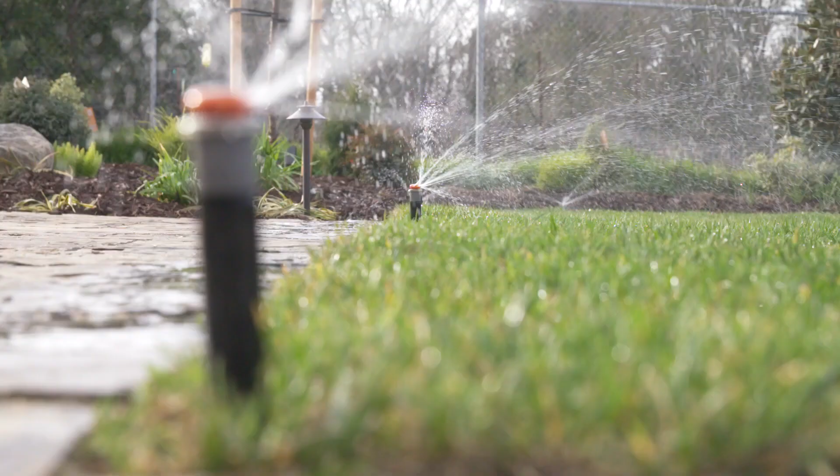A professional automatic irrigation system is designed to ensure different plant types get the correct amount of water they need. Automatic irrigation systems save time by letting the technology handle the routine and time-consuming process of watering landscapes. A modern system saves money by adjusting watering schedules automatically when the weather changes.

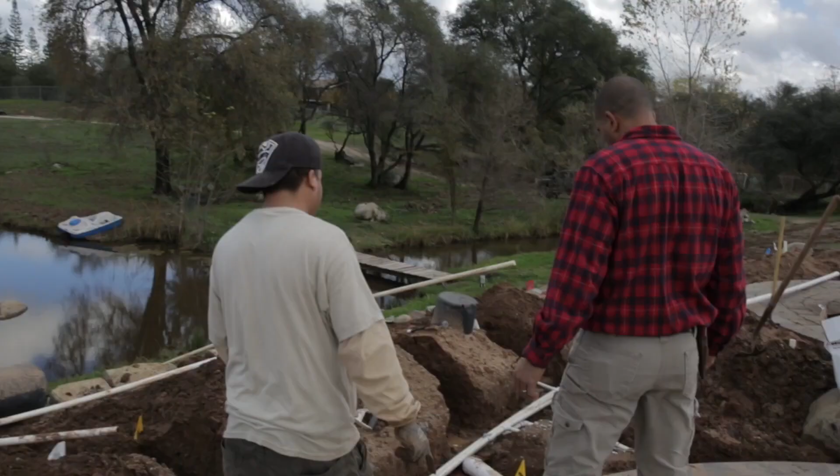A professional irrigation system prevents tripping hazards by moving the water throughout the property while being out of sight and out of mind, with no messy hoses laying around for someone to trip on. And being underground, the system of pipes and spray bodies are protected from seasonal weather and routine maintenance. The main reason for having an irrigation system is to help provide a beautiful landscape. This can increase property value and have a positive effect on your quality of life.

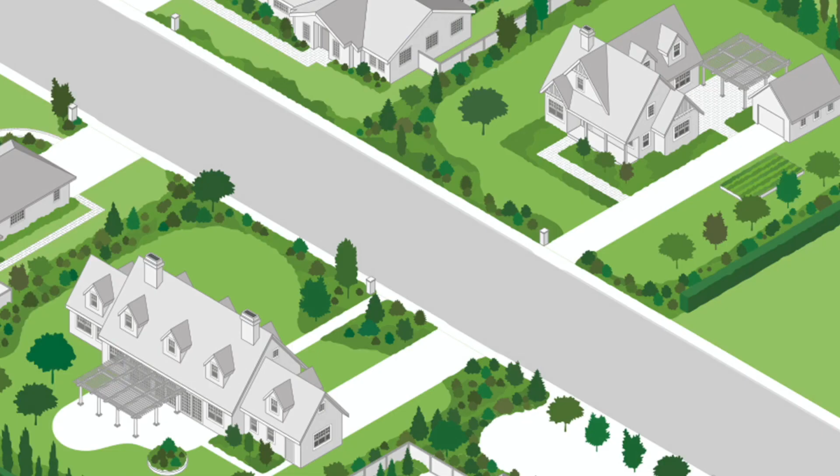Now, let's go through and identify the components of an irrigation system. An irrigation system is comprised of many components. Each component serves a unique purpose in the functionality of an irrigation system. All irrigation systems require a water source. It may seem obvious, but it will be very important to know where the water is coming from, so make sure to verify the water source before beginning your installation.

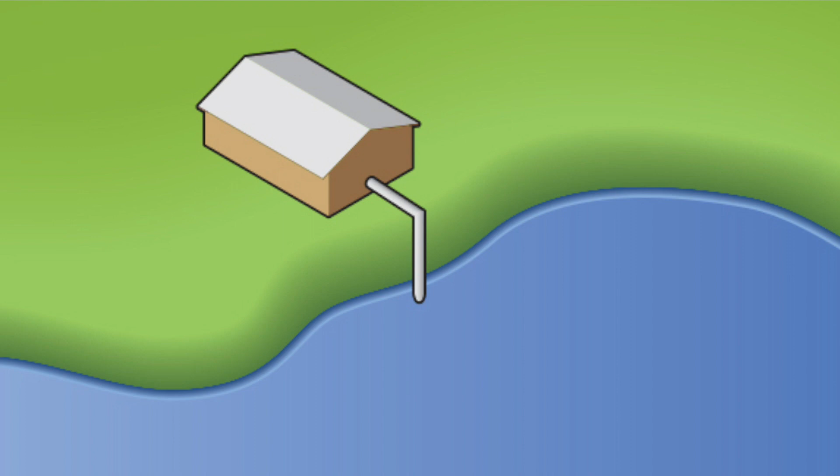Water sources may vary from site to site and region to region. The water source might be delivered in a network of pipes that run under the roads that we drive on every day. This network of water pipes is referred to as service main lines. Water can also be pulled from the ground or surface water sources like ponds, lakes, streams, and rivers using pumps to create the pressure needed to operate the sprinklers.

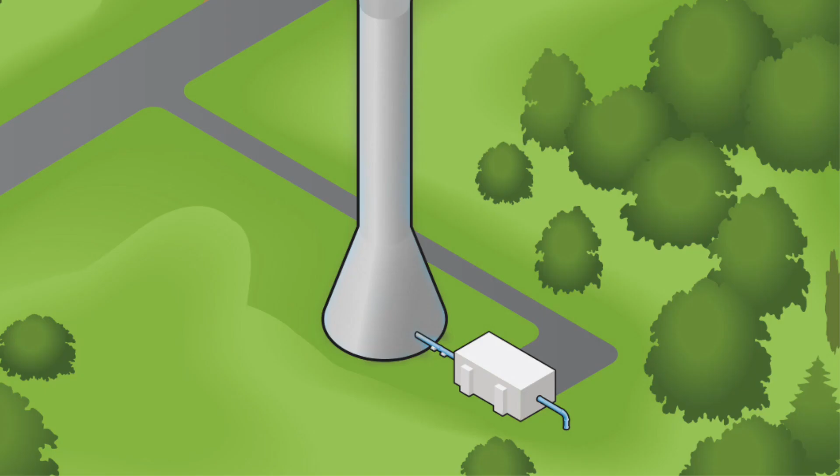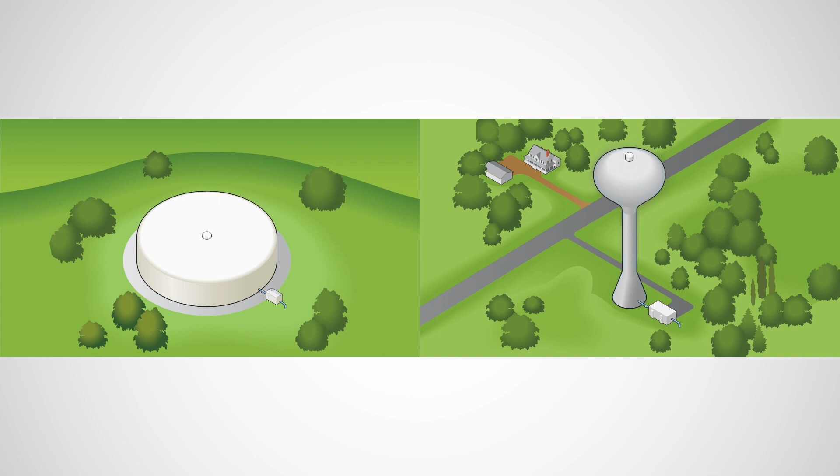You may have a municipal connection, like a metered potable water service or a metered recycled or reclaimed water service. In this example, the water source is a municipal metered potable connection. With a municipal supply, pressure is created in the water supply lines by pumps or by gravity-fed supply tanks on hilltops or water towers you see throughout cities. These are maintained by the supplying agency.

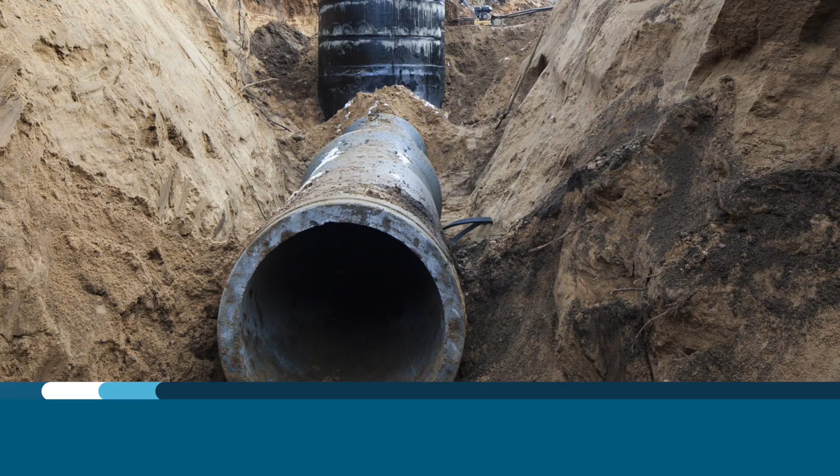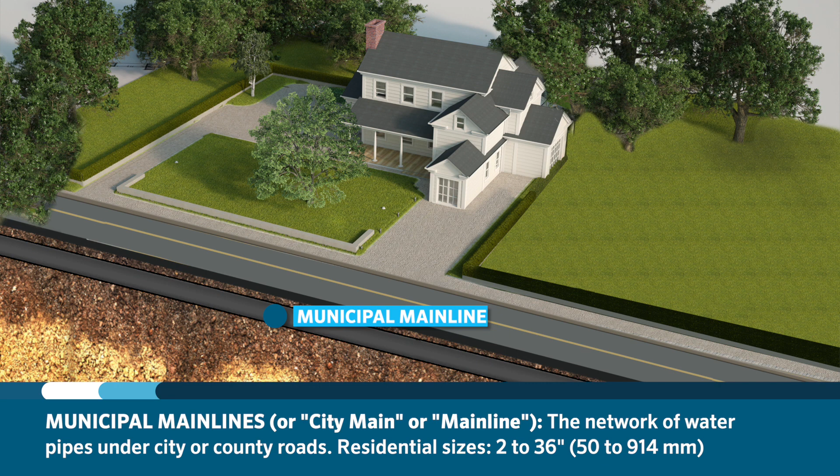The network of pipes deep under the city or county roads service homes, commercial properties, and fire hydrants. These pipes are usually very large and typically range from about 2 to 36 inches. These are called municipal main lines and may often be referred to as city main or main line. A saddle tap is installed on the city main line to access the water and deliver it to a property through the service line.

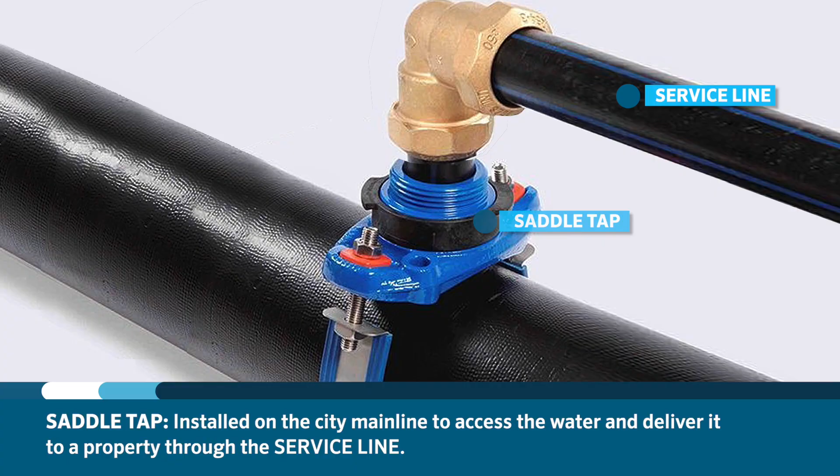Between the city main and the water meter, you may find a curb stop. A curb stop is an outdoor isolation valve where the water provider can turn water on or off for a property. This is usually found in a valve box just inside the property line. In cold weather climates, this valve is deep in the ground below the frost line. The water then passes through the service line to a water meter.

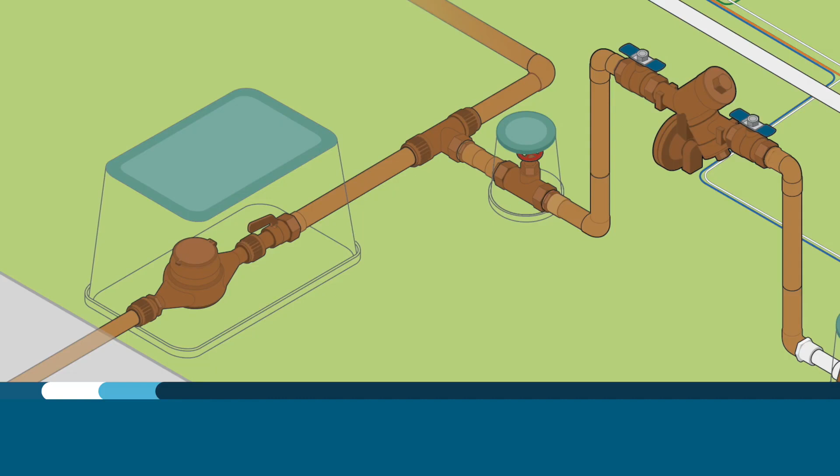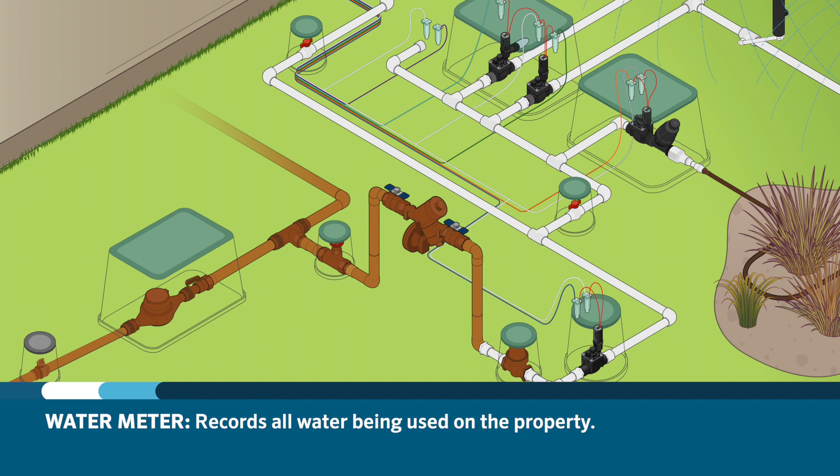So what is a water meter? The water meter reads and records all water being used on the property. Before the water can be used on the property, it must pass through a water meter to track the quantity of water used inside the building or out in the landscape. In many areas, one water meter is installed to service both indoor and outdoor water use. Other areas may require installation of 2 water meters, one for indoor use and one for outdoor use.

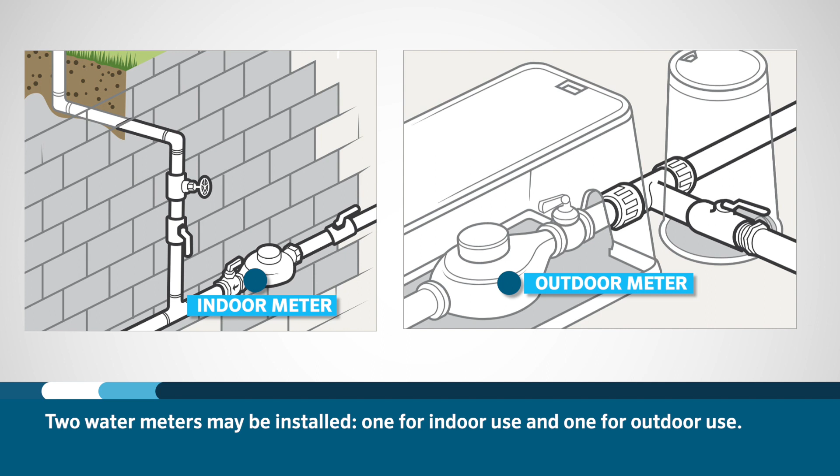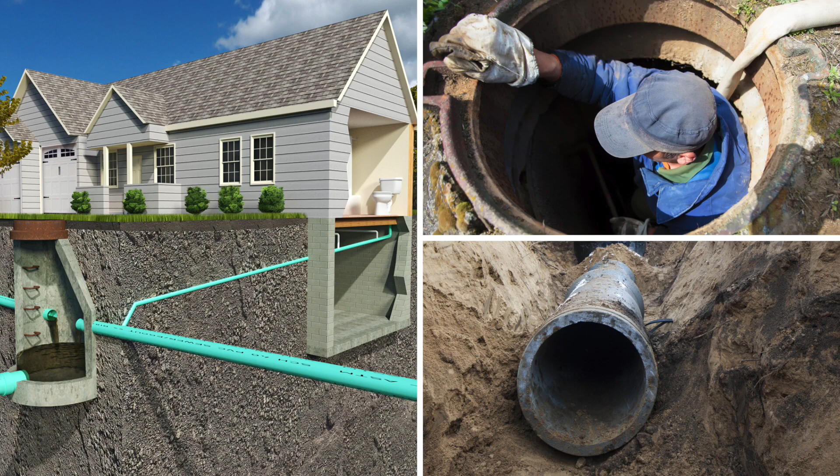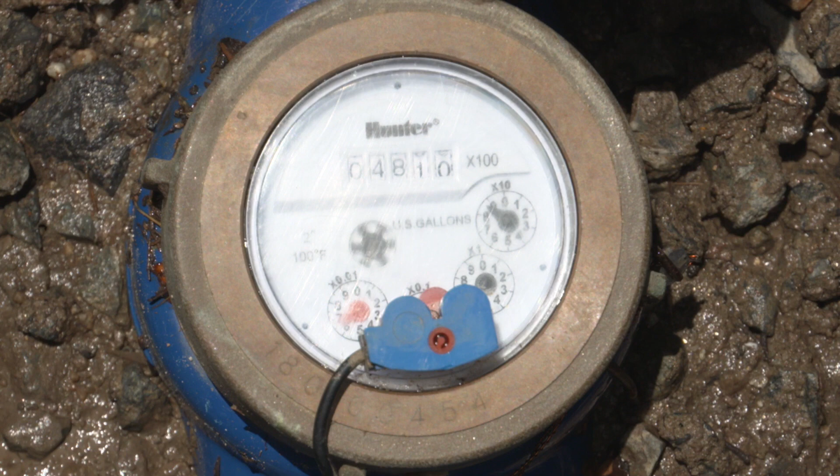One advantage to having a dedicated irrigation meter is to eliminate costly sewer fees commonly incurred with indoor water use meters. This is because water that enters the home is assumed to leave the home and go into the sewer system, and water used by the outdoor irrigation system is assumed to stay in the landscape. Another advantage is that it allows measurement and therefore better management of landscape water, maximizing efficiency and helping to ensure a beautiful and healthy landscape.

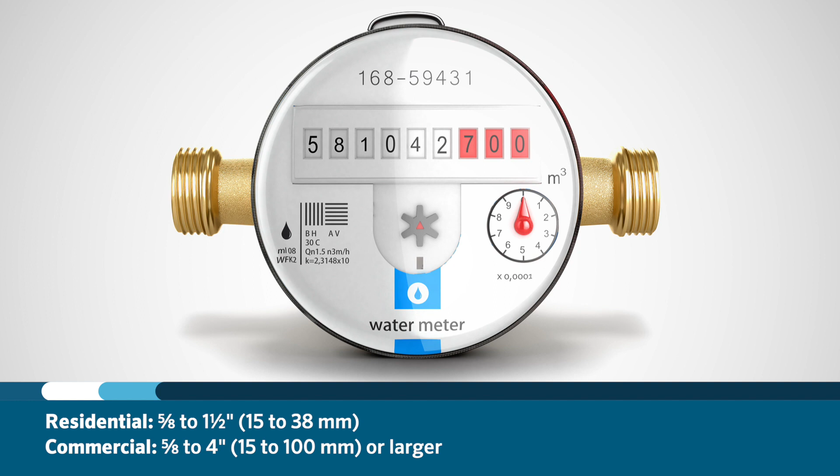Meter sizes range from 5/8 inch to 1.5 inch for residential properties and can range from 5/8 inch to 4 inches or larger for commercial irrigation systems. A typical warm weather installation will have a meter box where water comes from the city main through the water meter to the delivery line.

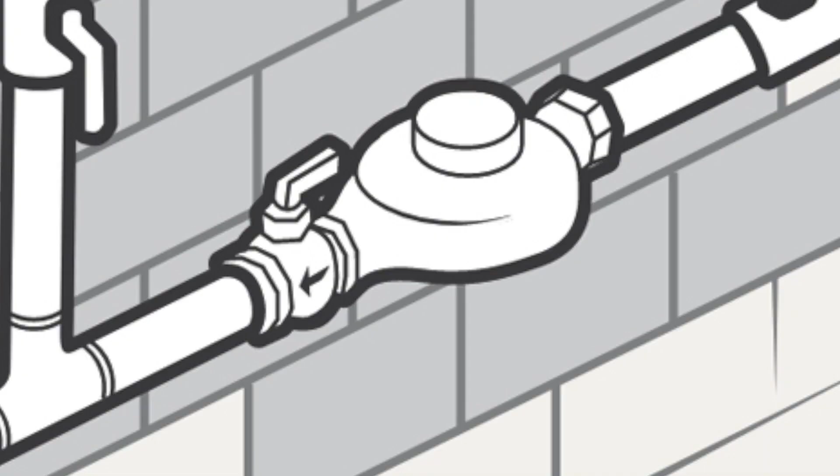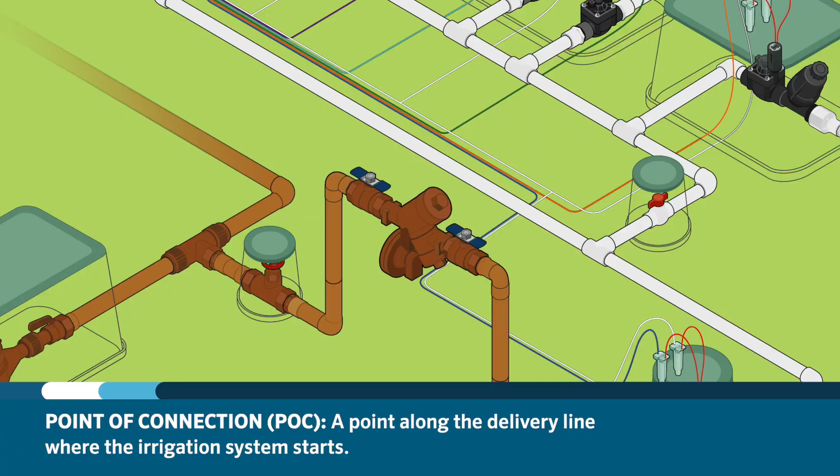For cold climates where freezing temperatures are likely, the water meter may be placed inside the building. After the water meter, the water moves through the delivery line to provide water to the house or building. A point along the delivery line is chosen to be the point of connection or POC for the irrigation system. Typically, this is where the irrigation system starts.

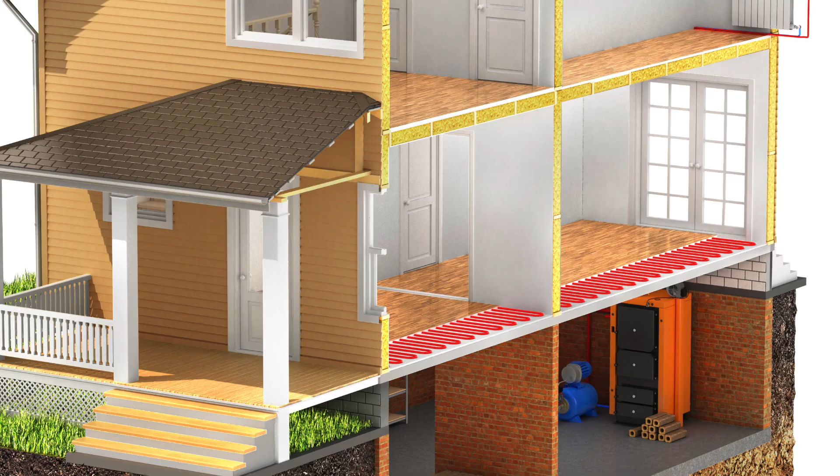Water is directed to the irrigation system from the delivery line that supplies water to the home or commercial building. This will be different if the irrigation system has a dedicated water source separate from the meter to the home. In warm climates, the POC is usually before the building, and in cold climates, the POC could be inside the building.

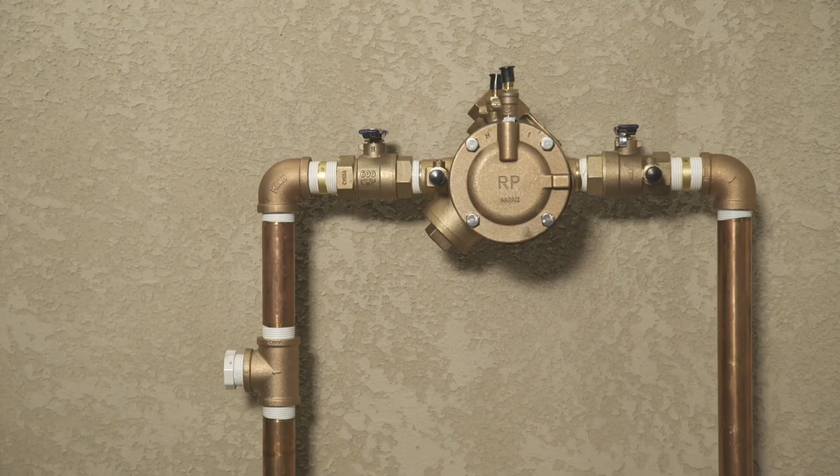At this point, a compression or slip tee is installed at the POC. The tee can be made of various materials. Check your local codes for the appropriate type used in your area. Note that in cold weather climates, an additional quick connect type fitting and drain valve should be added to the point of connection for winterizing the irrigation system.

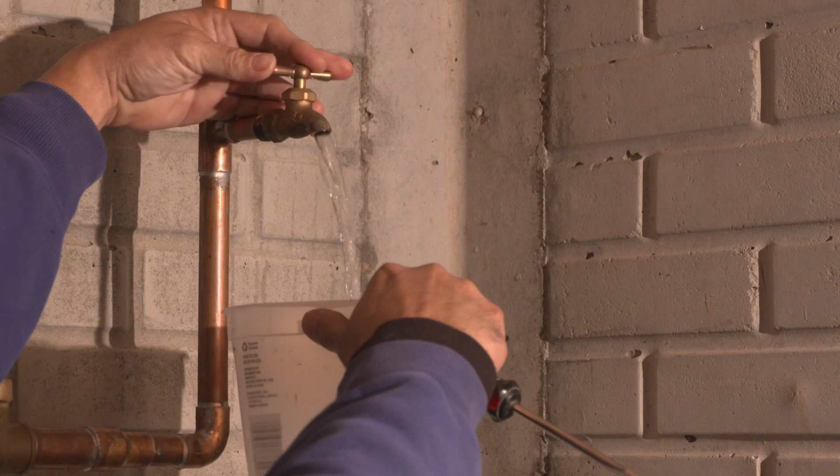Most cities require the use of a device known as a backflow preventer to prevent contamination of the potable water source by ensuring that no water that has been directed to the irrigation system can make its way back to the delivery line or municipal service line. The three most commonly used are a pressure vacuum breaker or PVB, a reduced pressure zone or RPZ, and a double check assembly or DCA.

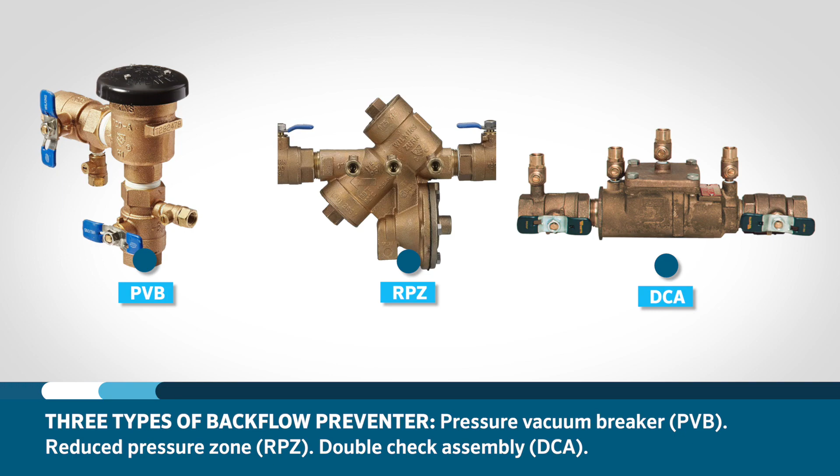After water passes through the backflow prevention device, internal check valves prevent water from flowing in the opposite direction. The installation of this device is often required by local code and typically requires a licensed professional. Check your local code to determine which backflow prevention device is required for your system.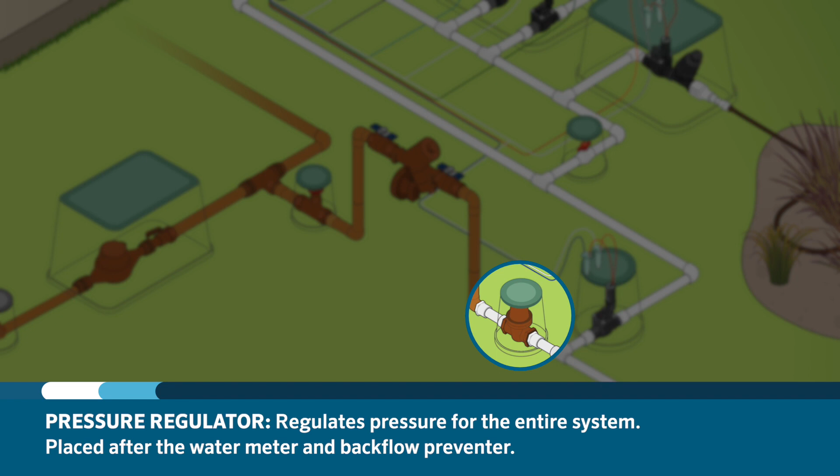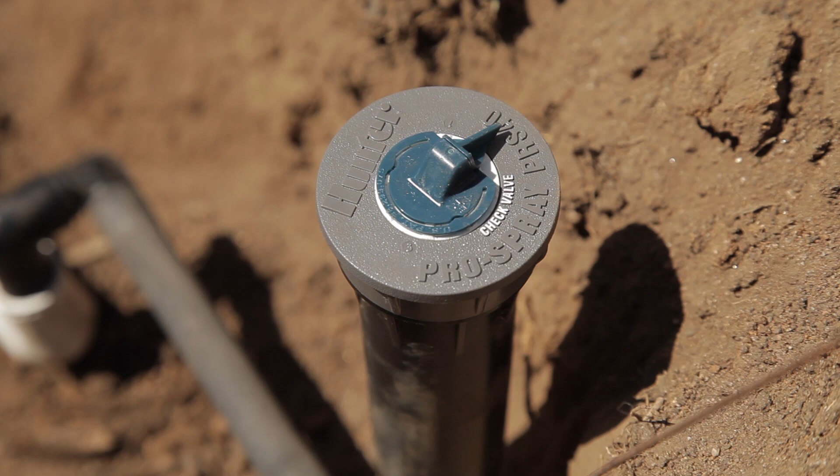After the water meter and the backflow preventer, there might be a pressure regulator to regulate the pressure to the entire system. A pressure regulator should be installed if the incoming pressure is much higher than the system requires. There are other products that can be used in the system to help regulate pressure, such as pressure regulators for control valves or pressure-regulated sprinkler bodies, but those should not be a substitute for pressure regulation at the point of connection.

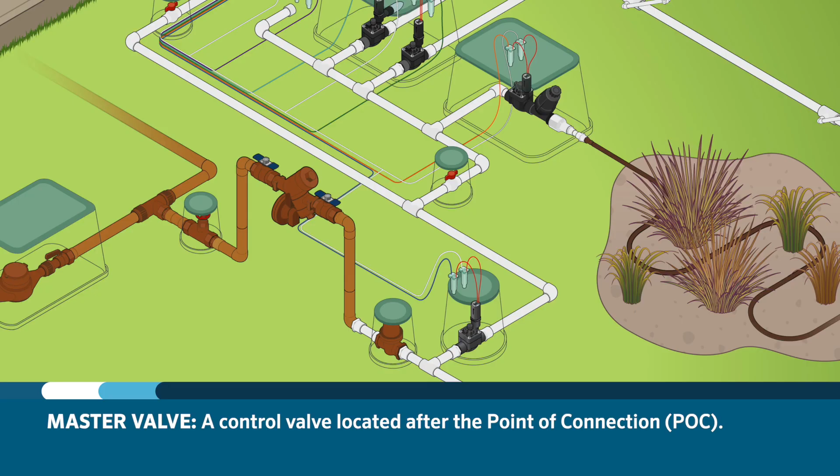After the pressure regulator, an optional and highly recommended device known as a master valve can be installed. The master valve, in most cases, is simply a control valve located after the POC. There are both normally open and normally closed master valves. Since a normally closed master valve is the one most commonly used in smaller irrigation systems, we will be referring to that type during this training.

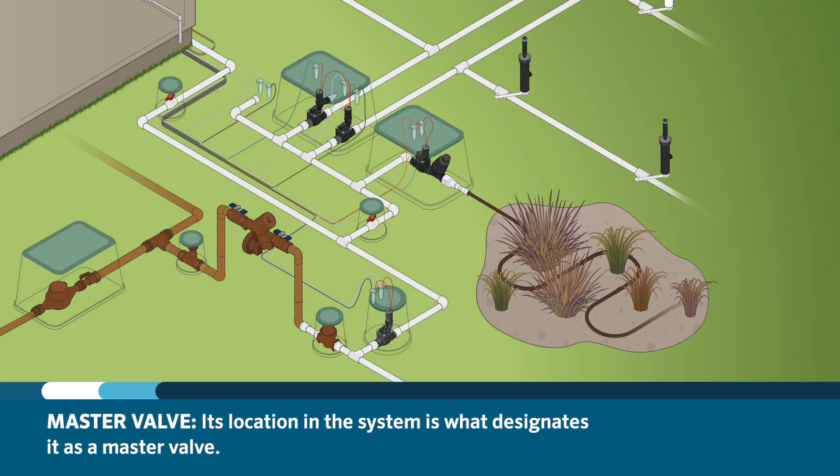A master valve is installed to avoid keeping the mainline and zone valves under constant pressure. We do this to prevent damage to the property created by irrigation mainline leaks. Its location in the system is what gives it the designation of master valve. For example, you may use a Hunter ICV for both a station valve as well as a master valve. The master valve must activate simultaneously with any station valve for water to flow through the system.

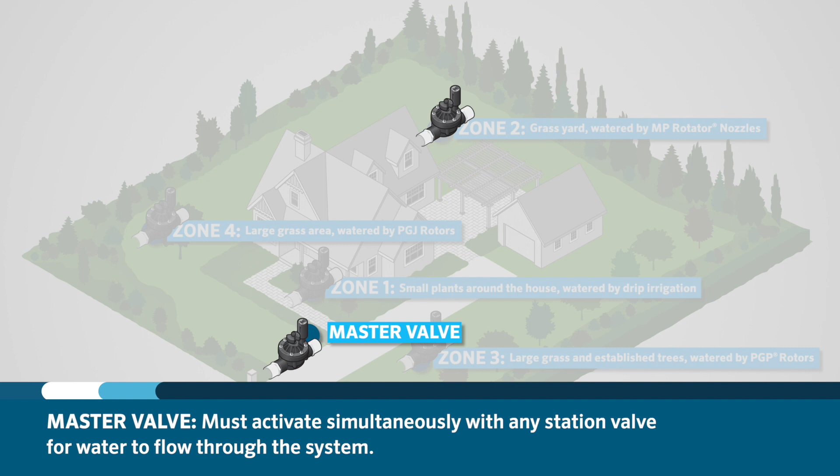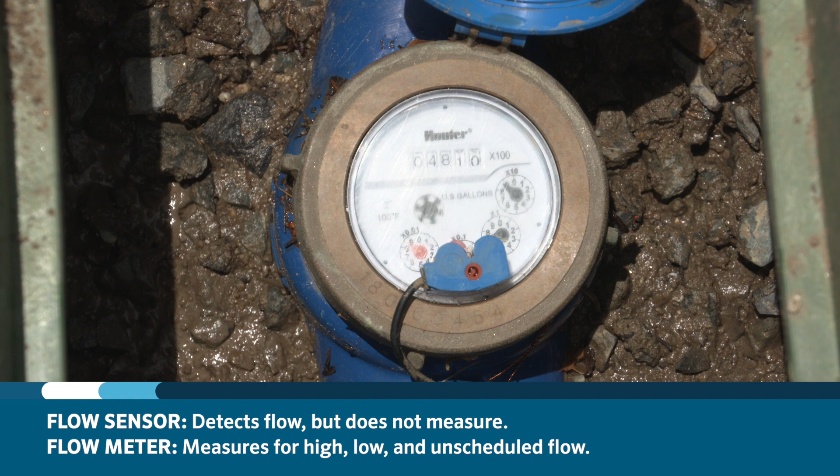Another highly recommended device, known as a flow sensor or flow meter, may be added to the system to monitor for high, low, and unscheduled flow. A flow sensor or flow meter, in combination with a master valve, can help to identify failures in the piping system and shut down the system, preventing water waste and high water bills.

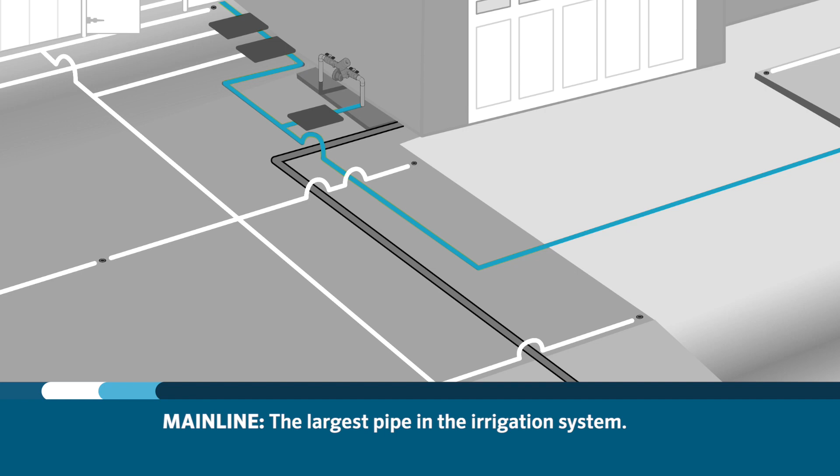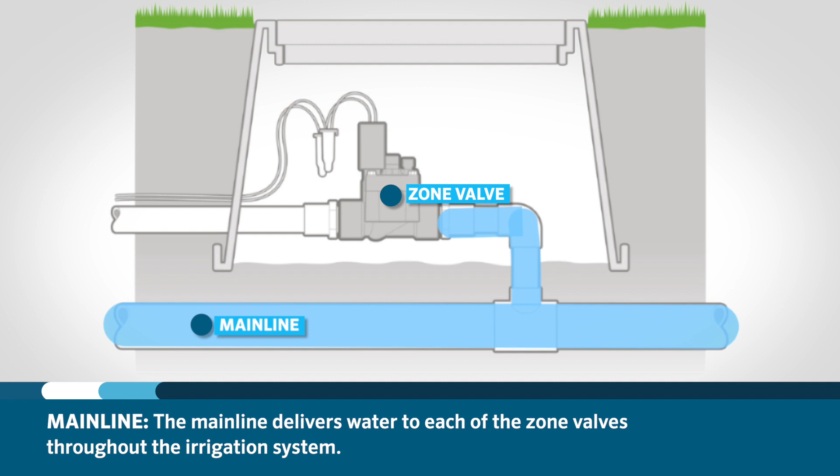Downstream of the master valve and flow sensor is the sprinkler mainline. The sprinkler mainline is the largest pipe in the irrigation system. If there is no master valve, this pipe is typically under constant water pressure at all times throughout the entire site 24/7. The mainline delivers water to each of the zone valves throughout the irrigation system.

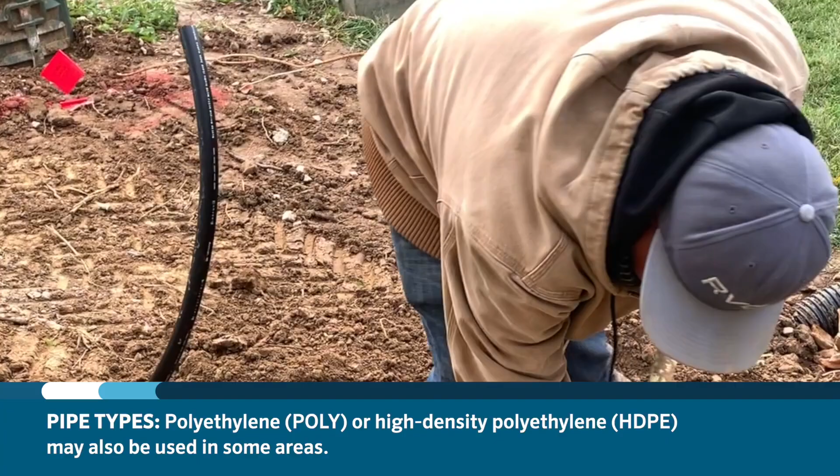PVC pipe is the most commonly used pipe for this, but in some areas, polyethylene, also known as poly, or high-density polyethylene, or HDPE, might be used. If a normally closed master valve is installed, the mainline only remains under pressure during scheduled irrigation cycles.

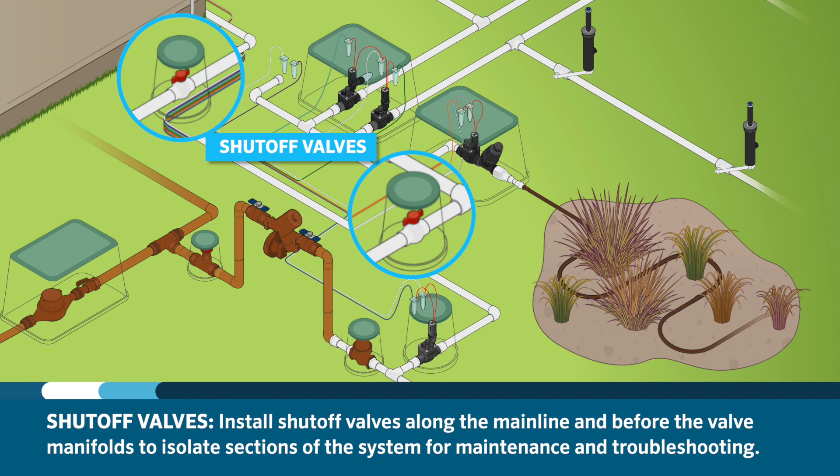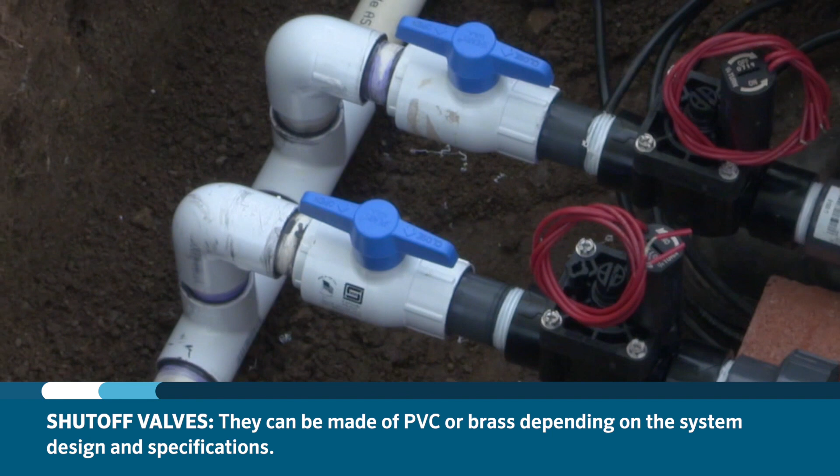Along the mainline and before the valve manifolds, it's recommended that shutoff valves be installed to isolate sections of the system for maintenance and troubleshooting. These are generally the same size as the line they are on. They can be made of PVC or brass depending on the system design and specifications.

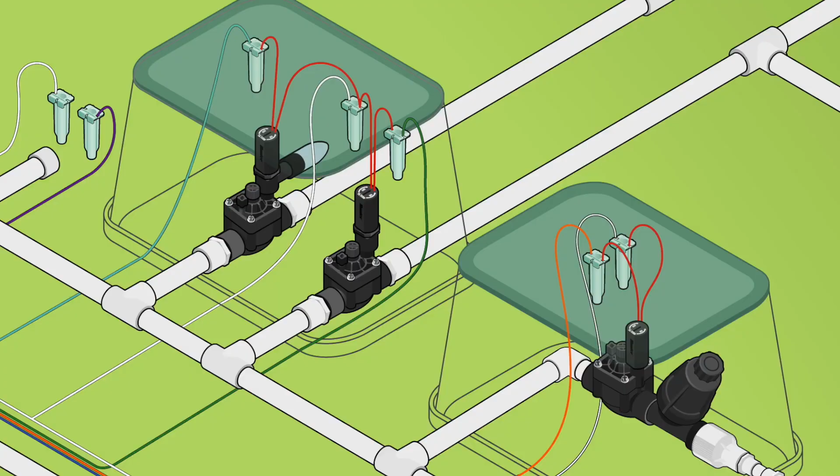The mainline connects to the valve or valve manifolds. Valve manifolds are a grouping of valves that control water flowing through the zone or stations on a property. Sometimes these are called automatic control valves, remote control valves, or electrical zone valves. Electrical zone valves are installed to control the water flow to the sprinklers in each zone.

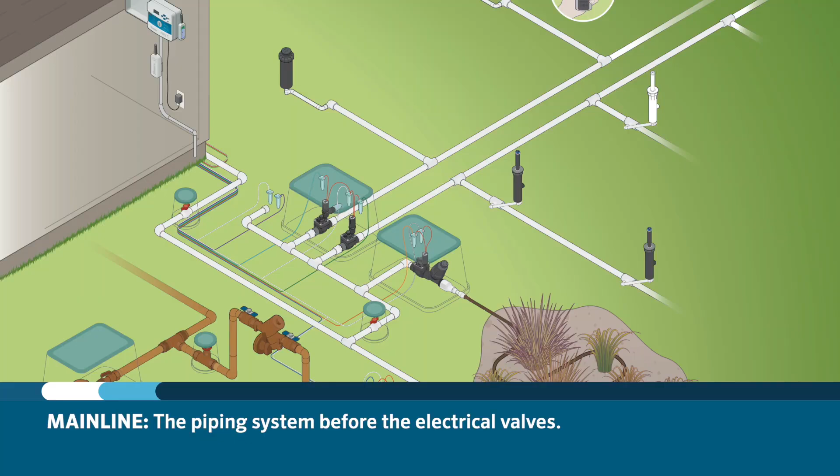Only when the controller sends a 24-volt alternating current electrical signal to open the particular valve will that valve open and allow water to flow from the main line through the lateral lines to the sprinklers or emitters. The piping system before the electrical valves is referred to as the main line, and any pipe system after the electrical valves is referred to as lateral lines.

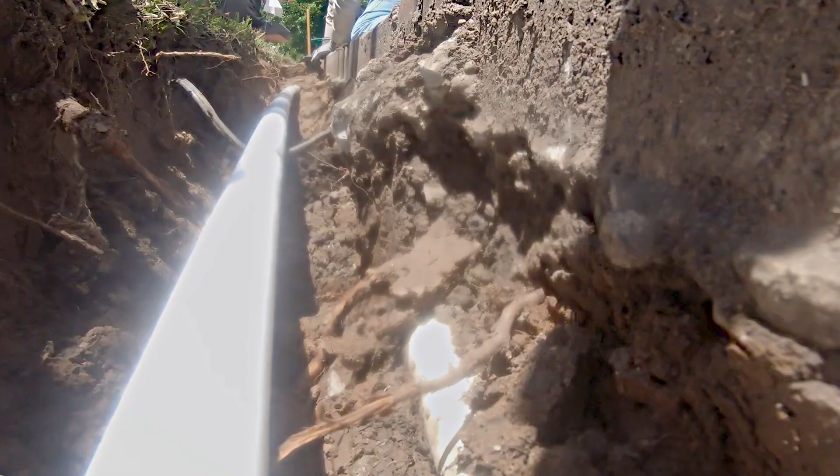Lateral lines connect all the sprinklers on one zone and allow the water to flow from the valve to the sprinklers in the zone. When the valve opens, the lateral line fills up with water and the sprinklers pop up, or the drip lines are filled with water and build pressure to activate the emitters.

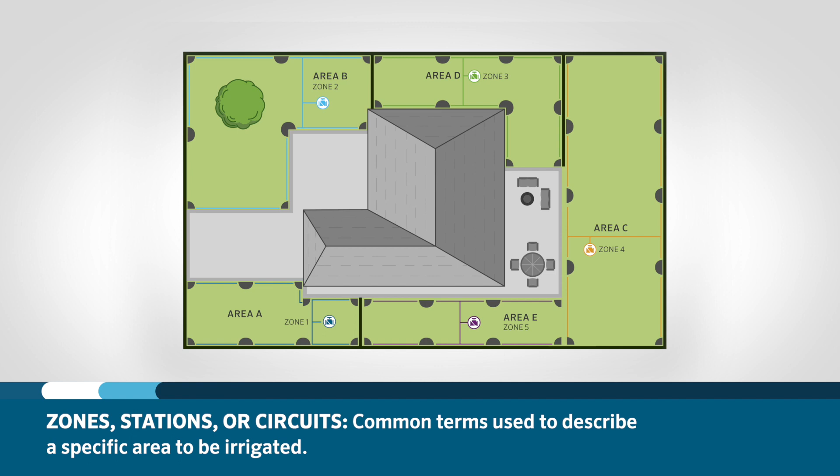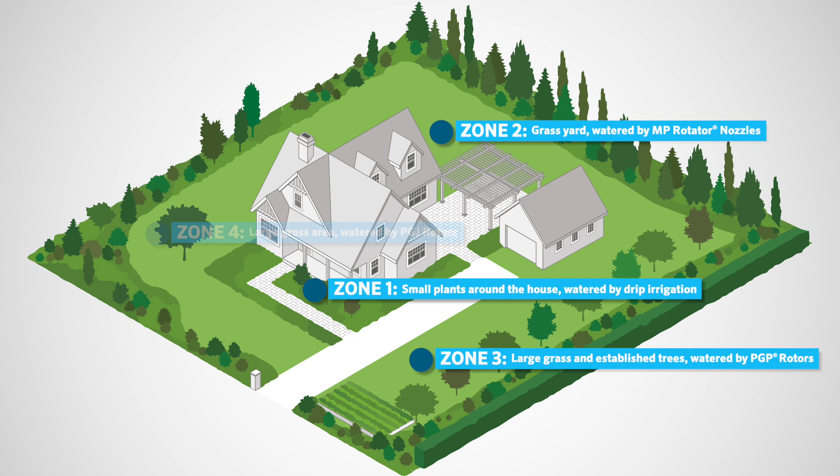So, what is a zone? A zone is an area with similar plant material, sprinkler types, and sun exposure. Zones, stations, or circuits are common terms used to describe a specific area to be irrigated. In this training, we will use the term zone. Areas throughout the property are divided into multiple zones depending on water capacity and the landscape needs. Each zone will have its own valve, lateral lines, and emission devices.

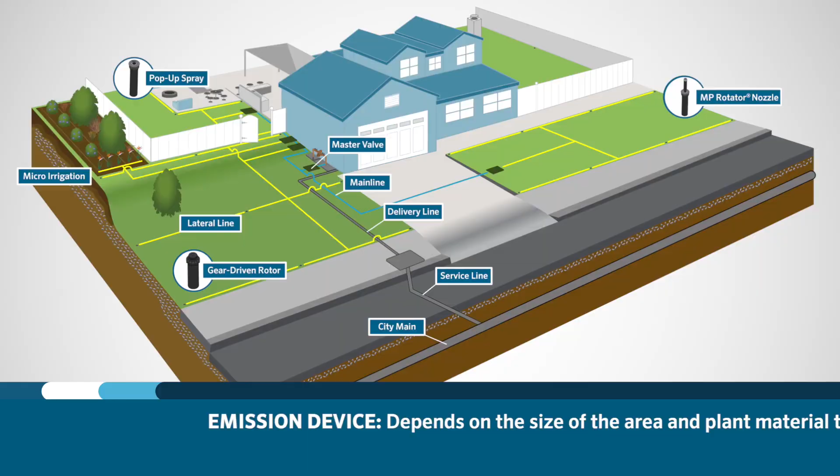Emission devices include, but are not limited to, bubblers, drip, MP rotators, and rotors like the PGP or I-20. The type of device needed is dependent on the size of the area and plant material to be irrigated. It is also important to consider available water pressure and maximum available flow when considering an emission device or other components.

Valves don't just operate on their own. They open and close to allow or stop water flow via a 24-volt alternating current electrical signal sent on a wire from a controller to the solenoid on the valve. The controller is the electrical device that sends the 24-volt signal to the valve that is programmed to open.

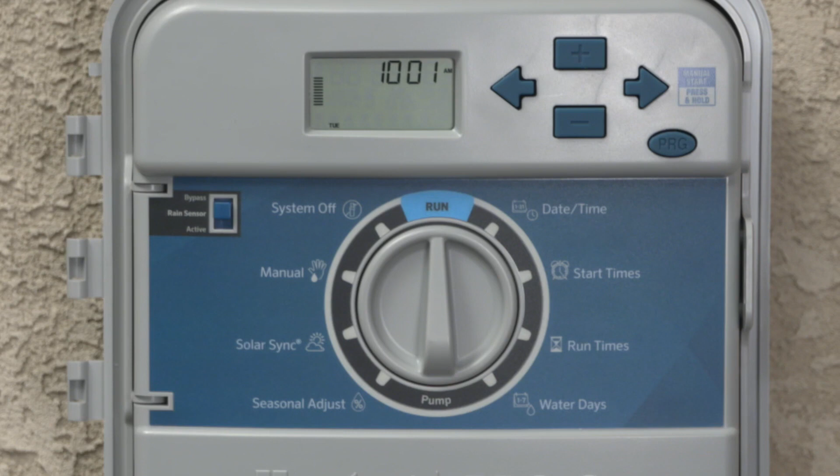The controller hosts the programming for the irrigation system. Once the controller is properly set to automatically irrigate the landscape, only minor adjustments should be necessary. It's important to adjust your controller seasonally to maximize water savings for your customers. Some controllers use weather data received from the internet to change the schedules based on the climate conditions.

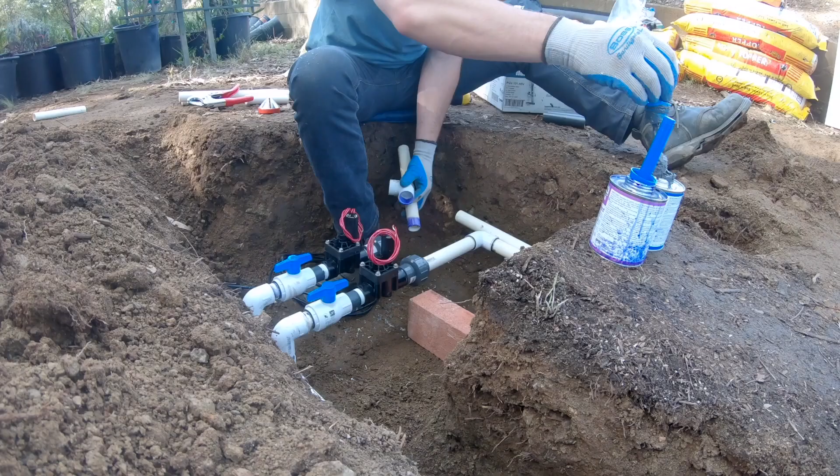The controller is connected to the electrical zone valve through insulated heavy-duty wires. The valve has two wire leads coming out of the solenoid. One is known as the hot, the other is known as the common. The hot wire from each valve is directly connected to each of the individual station terminals at the controller, while the common wire is common to all stations.

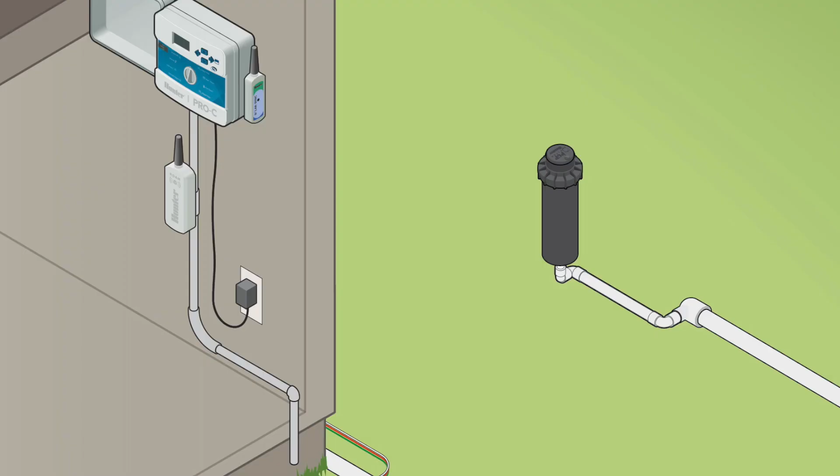A common practice in the industry is to use white cable to differentiate common wires from the rest of the colored hot wires. This is connected at the common terminal at the controller and goes out to the field where all valves get connected to the single wire.

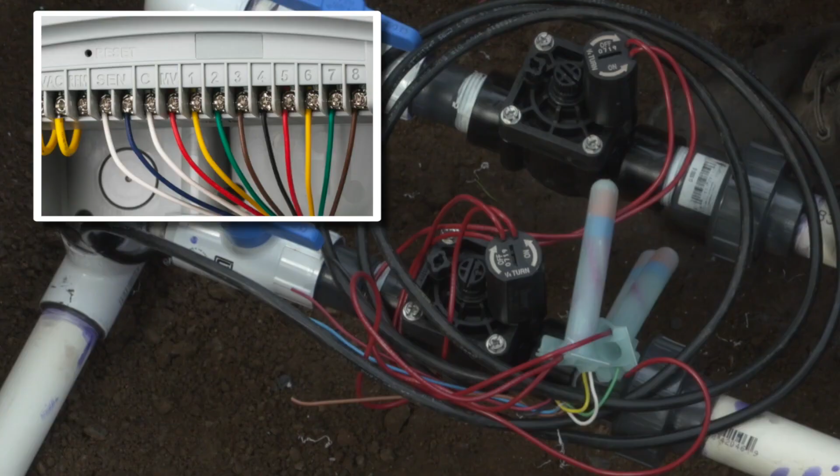So we have the piping system moving water through the property and a controller that runs the programs operating the valves. The valve sends water through the lateral lines to their zones where water is emitted by a device like a spray or a rotor. Let's describe what these different water emitting devices are called and how they get water into their zones.

When water is available to the sprinklers or other emission devices, they irrigate the designated area. Pop-up sprinklers include rotors, sprays, MP rotators, and bubblers. Other emission devices include point source or inline drip irrigation.

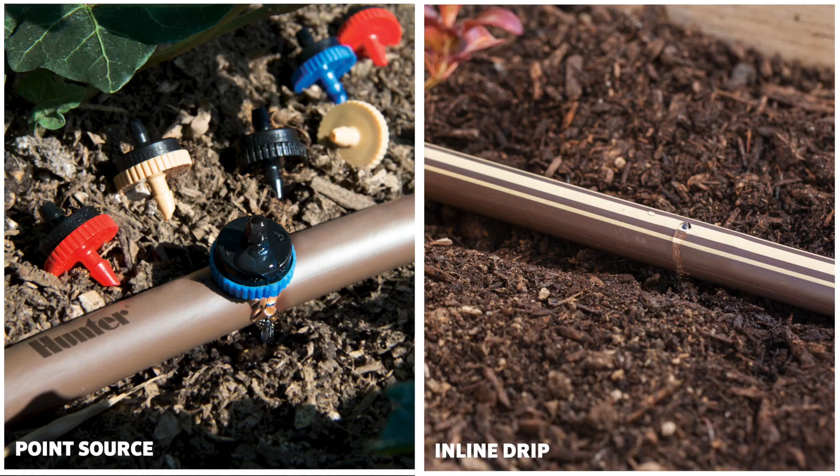Pro spray heads cover short to mid-range areas between 2 feet and 17 feet and apply water at a relatively high application rate. Spray heads have been the preferred method of overhead irrigation of smaller spaces for decades.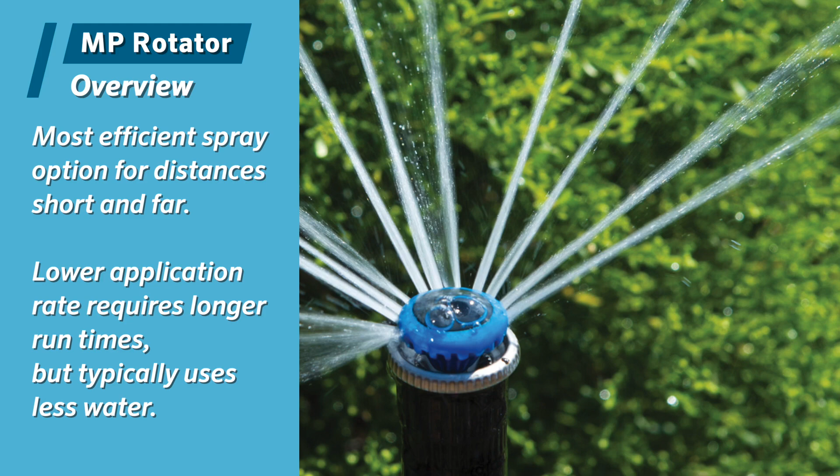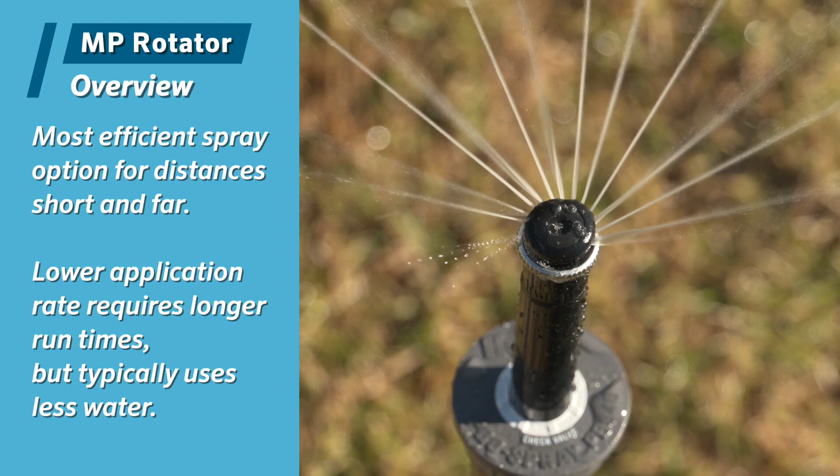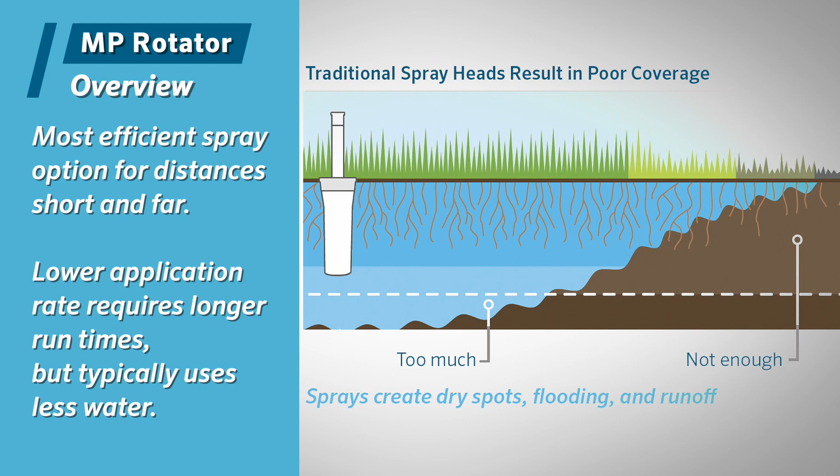MP rotators are another form of overhead irrigation designed and used in short to large radius areas from 6 feet to 35 feet. MP rotators are a type of highly efficient rotary nozzle that fit on pro spray bodies and shrub adapters. MPs apply water at a much slower application rate than traditional sprays, allowing water to penetrate and move through the soil before it runs off the target irrigation area onto hardscapes.

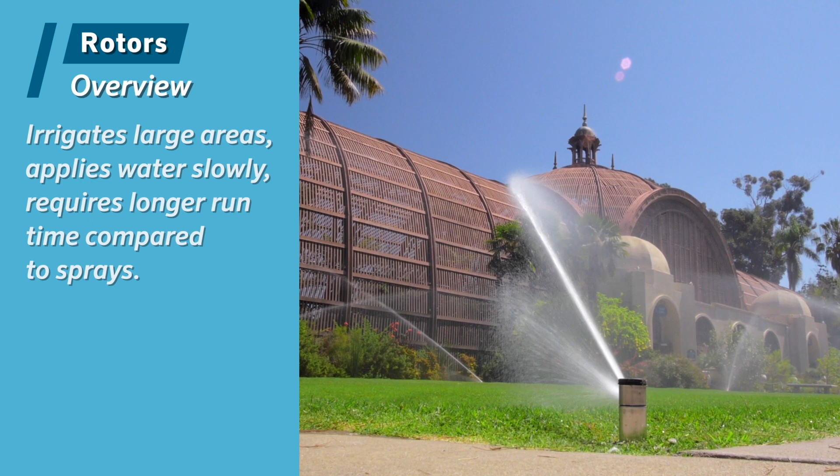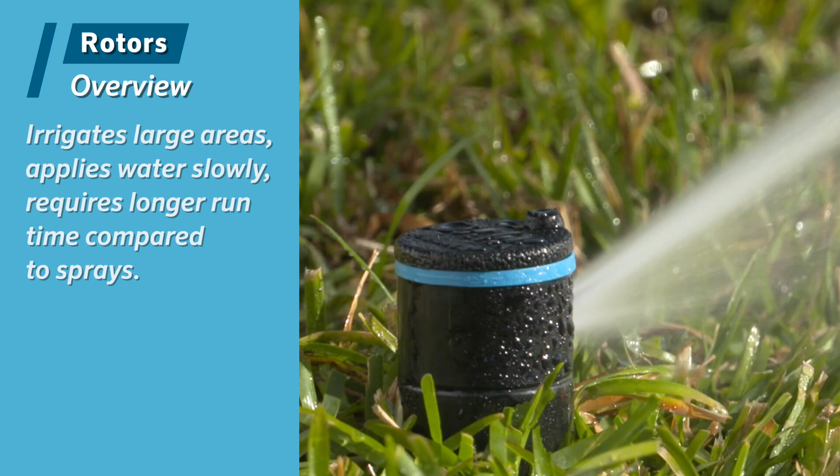Rotors are known to be a large area type sprinkler and have a radius range from 15 to 103 feet. You will typically use PGJ, PGP, PGP Ultra, or I-20 for these large areas in residential or commercial applications. Rotors apply water very slowly and tend to be considered more efficient than sprays, but will require longer run times to adequately irrigate a given area.

In this example, Station 1 is a PCZ drip control zone kit that includes a filter and pressure regulator. It's important to use a filter and pressure regulator when installing micro-irrigation components, as they require lower operating pressures and have small openings that could become clogged with debris in the water. Refer to the Hunter catalog or Hunter website for a full list of micro-irrigation products.

Station 2 is an example of an MP rotator zone with head-to-head coverage. Head-to-head means that the heads are spaced so that one head's water throw reaches the adjacent head. Head-to-head spacing results in even coverage of water so that all plant material in the zone receives the same amount of water.

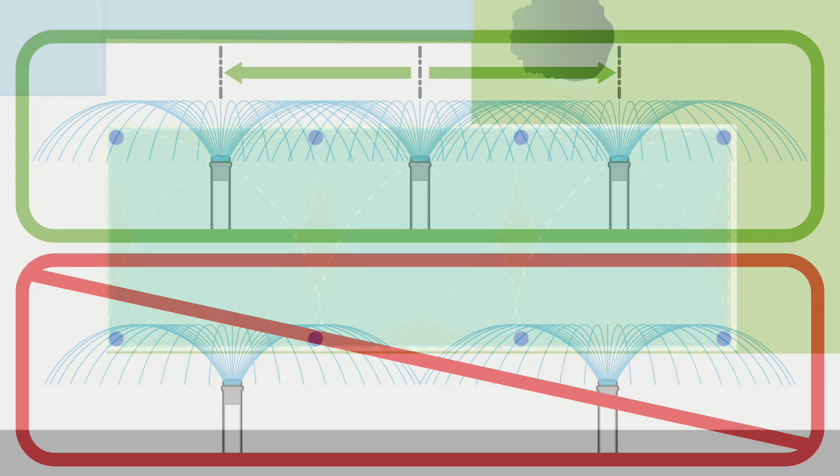It's important to note here that no other sprinkler types are being used with the MP rotator, and only similar plant material is being irrigated. This is an example of a station with proper hydrozoning. Remember, a hydrozone is an area of similar plant material being irrigated by the same type of emission device.

Station 3 is an example of a gear-driven rotor zone. You'll want to use the same brand and type of rotors and select the proper nozzles. This is also an example of a station with proper hydrozoning.

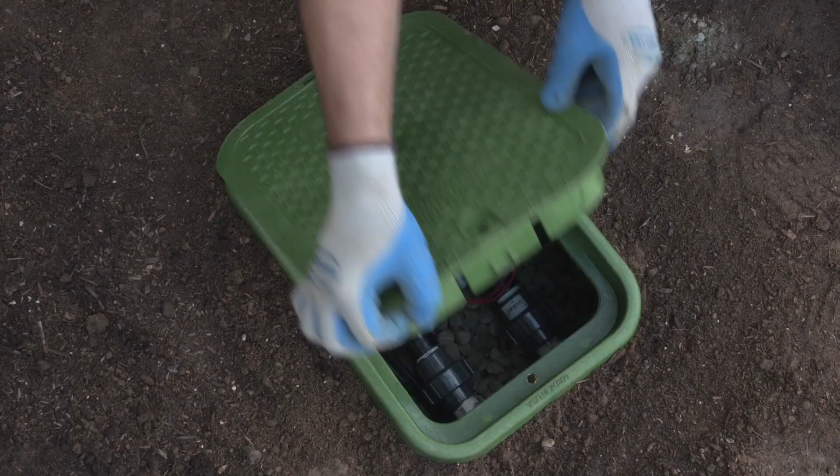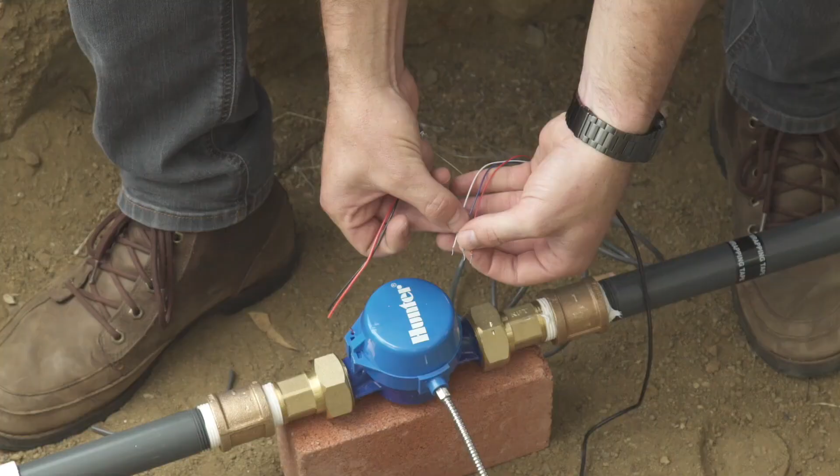To activate any of these valves, a 24-volt alternating current electrical signal is sent to the valve from the irrigation controller. The signal is sent through a set of station control wires to open the valve solenoid, which allows water to flow through the valves, through the lateral lines, and then to the sprinklers or irrigation devices. The flow sensor or flow meter will receive its own set of wires separate from the valve wires.

There are a number of accessories that can be used in an irrigation system, such as rain sensors, remotes, pressure regulators, etc. For this introduction, we are focusing on the main components that make an irrigation system functional. More information about these products will be discussed throughout the rest of the videos in this series.

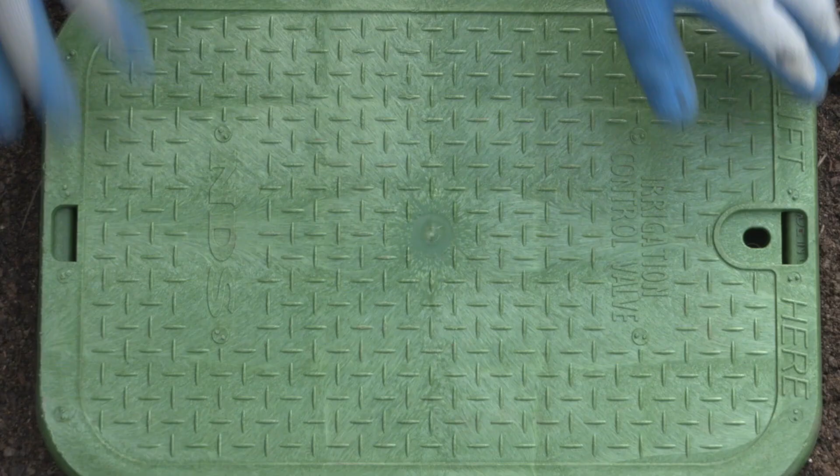To recap, an irrigation system begins at the point of connection from an incoming water source. The water is moved through a master valve to a main line that then makes its way to a valve manifold group of zone valves. Each zone valve has a solenoid on it with wire running from the controller that receives an electrical signal to open and close the valve, allowing water to reach its zone of sprays, rotors, or drip products that irrigate different parts of the landscape.

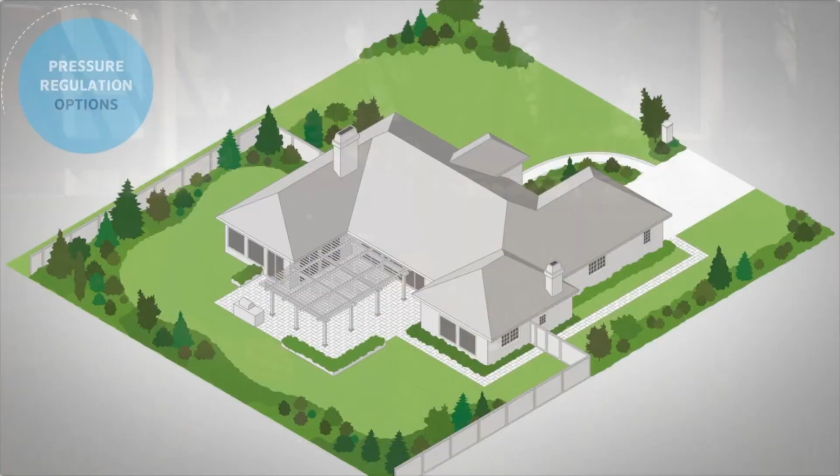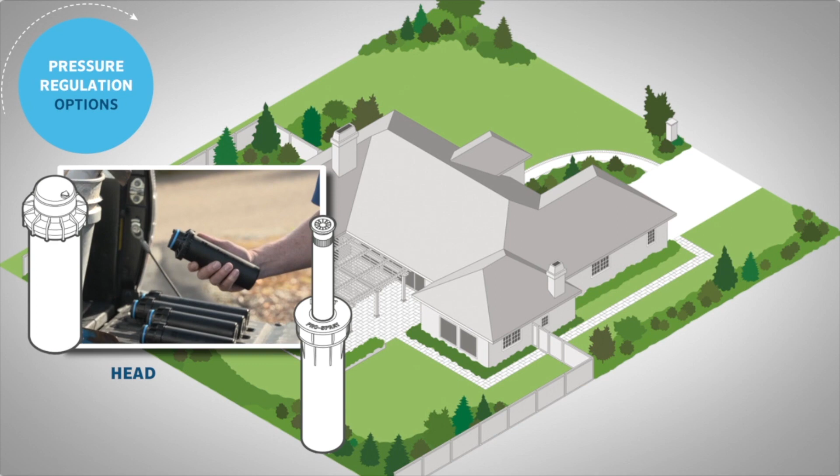Because different zones might need different water pressures, some valves are pressure regulated, while in other zones, the pressure regulation may occur at the sprinkler body. Different climates and areas dictate different irrigation practices, such as performing winterization of the system or different sources of water supply.

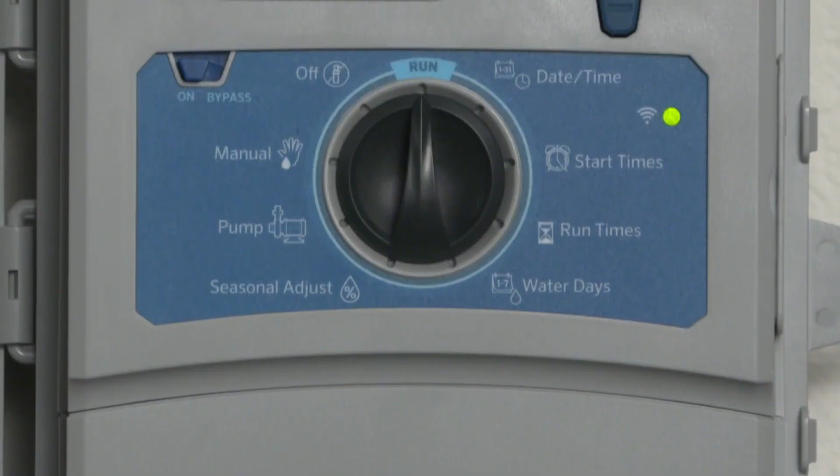Automatic irrigation systems are controlled by irrigation controllers, which send electrical signals to the valves to run a zone, and they may have wires connecting to the controller from flow meters or weather sensors that tell the controller information or to adjust or suspend irrigation. These many parts and devices make up an irrigation system. Once installed, routine maintenance and adjustments are recommended to ensure the system runs optimally for many years of use.